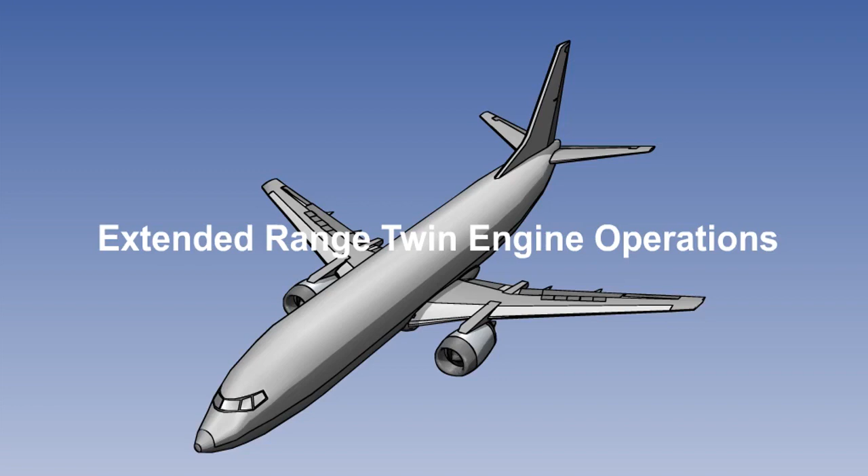ETOPS stands for Extended Range Twin Engine Operations. It is a regulatory framework to control the conduct of operations of twin-engined aircraft when their route takes them a long distance from the nearest diversion.

Let's start by first considering normal non-ETOPS operations. The majority of transport flights take place over routes where there are many en route alternate aerodromes. In the event of an emergency requiring an in-flight diversion, there are usually several available.

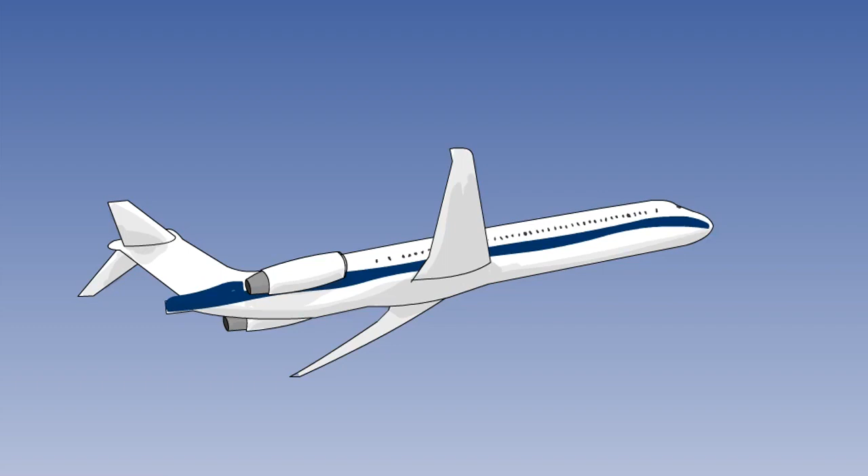Where there are no en route alternates, we have a procedure to establish point of equal time, otherwise known as critical point. However, proceeding for a long period with one engine out carries risks which have to be regulated and minimized. Traditionally, such operations were considered unacceptable for twin-engined aircraft.

For this reason, before 1985, long-range oceanic flights had to be carried out by 3 or 4 engine aircraft.

Under EASA rules, unless specially authorized by the controlling authority, a Performance Class A public transport twin-engined aircraft shall not fly a route that takes it more than 60 minutes flight time at its one engine out speed from an alternate. This is laid down in CSOPS, which was formerly known as JAROPS. Clearly, this imposes operational limitations.

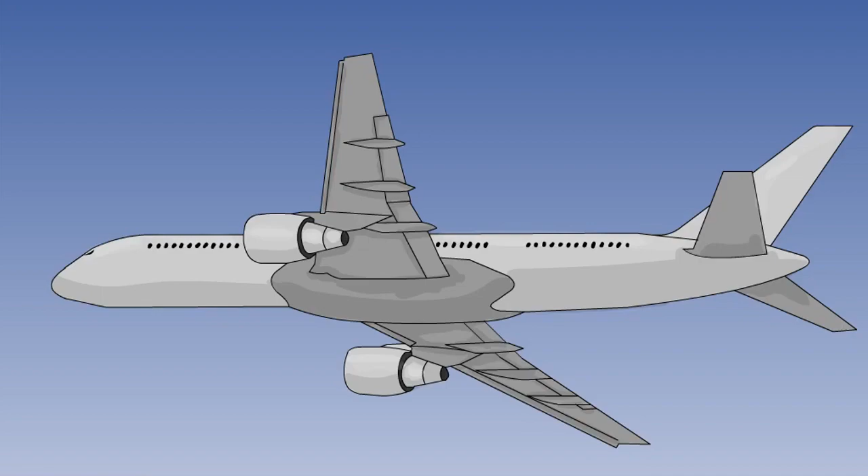This situation changed from the early 1980s onwards, when more powerful and reliable engines were developed. It became possible to build twin-engined aircraft capable of carrying large numbers of passengers over thousands of miles. Manufacturers and operators lobbied that the chances of an engine failing in flight were now extremely low, and also that

in the unlikely event of an engine failure, a twin-engined aircraft could still safely operate on one engine for longer periods than 1 hour. This argument was accepted, and the regulations were changed, allowing the first ETOPS flight to take place in 1985.

However, the regulation and control of such flights is extremely stringent. Each operator requires an individual ETOPS approval from its National Aviation Authority, and only certain approved aircraft types can be authorized.

Let's look at some of the definitions used in ETOPS. Firstly, ETOPS itself. The letters stand for Extended Range Twin-Engine Operations. It is defined as those operations intended to be, or actually conducted by twin-engined aircraft over a route that contains a point further than 1 hour's flying time in still air at the normal one engine inoperative speed from an adequate aerodrome. We shall look at the definition of an adequate aerodrome shortly.

We therefore need to define the normal one engine inoperative speed. The operator is required to determine a speed for the calculation of the maximum distance to an adequate aerodrome for each two-engine type.

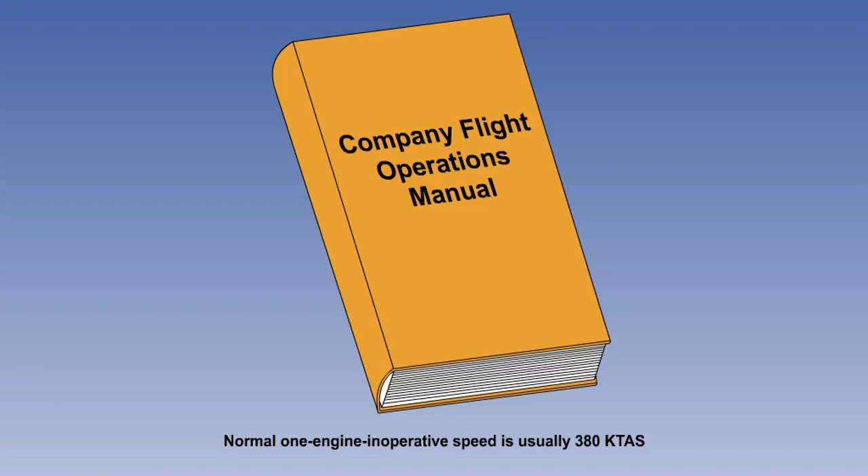The threshold time is the maximum time that a twin-engined aircraft is permitted to fly on one engine on any route unless it is governed by ETOPS regulations. It is 60 minutes.

Alternatively, it may be defined for some operators as a threshold distance, in which case it is the distance travelled in still air in 60 minutes at the normal one-engine inoperative cruise speed.

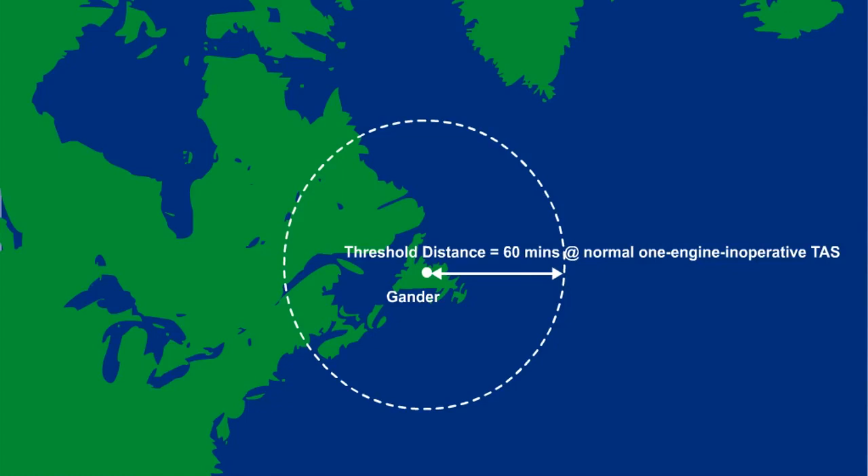However, where an ETOPS extension is granted, the rule time is used. This is defined as the maximum time at the normal one-engine inoperative speed that any point on the route may be from a suitable aerodrome for landing.

Again, we will look at the definition of a suitable aerodrome shortly. Alternatively, this may be quoted as a rule distance, in which case it's the distance travelled at the normal one-engine inoperative speed in the rule time.

The ETOPS entry point is that point along the track where the aircraft first passes the threshold distance from any adequate aerodrome. The ETOPS exit point is that point along the track where the aircraft is last more than the threshold distance from any adequate aerodrome.

The ETOPS segment is that portion of the route where the aircraft is more than the threshold distance from any adequate aerodrome. This may alternatively be known as the ETOPS sector. ETOPS regulations are applicable only over the ETOPS segment.

We now come to the definitions of an adequate aerodrome and a suitable aerodrome. Firstly, an adequate aerodrome. For every proposed ETOPS route, the operator must compile a list of alternate aerodromes to be used.

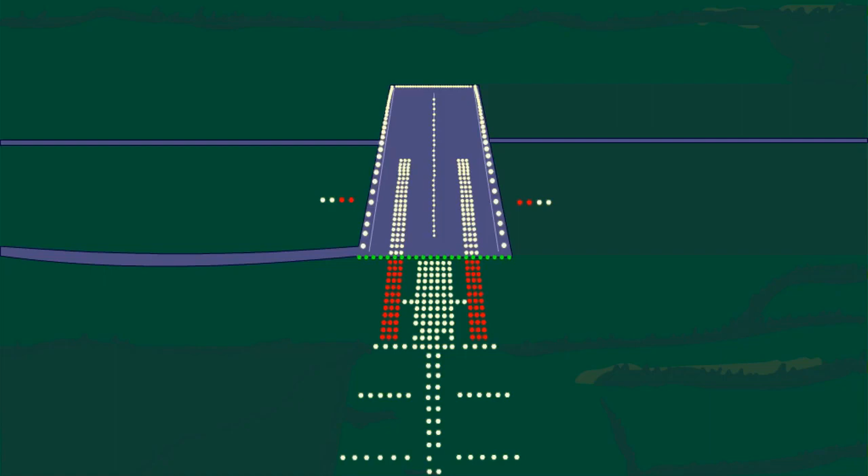These must be approved by the operator's National Aviation Authority and listed in the Company Flight Operations Manual. The runways must be long enough for the operator's aircraft types and must have a suitable surface and load-bearing capacity. The runway lighting must meet approved standards. There must be adequate air traffic control facilities.

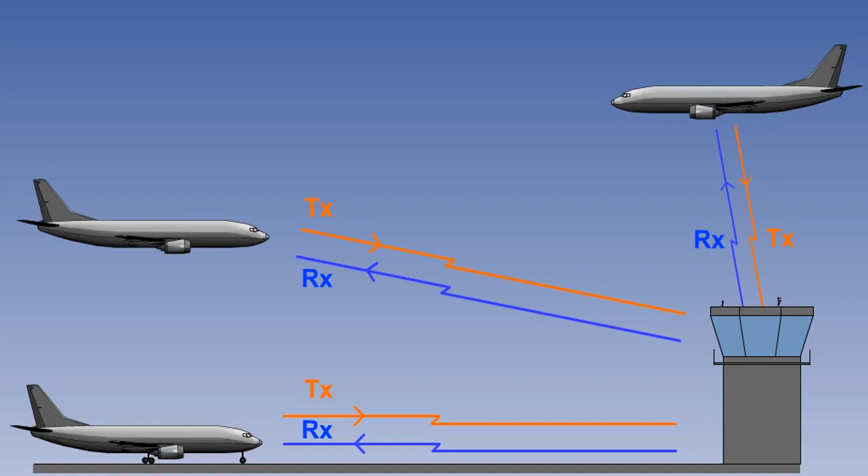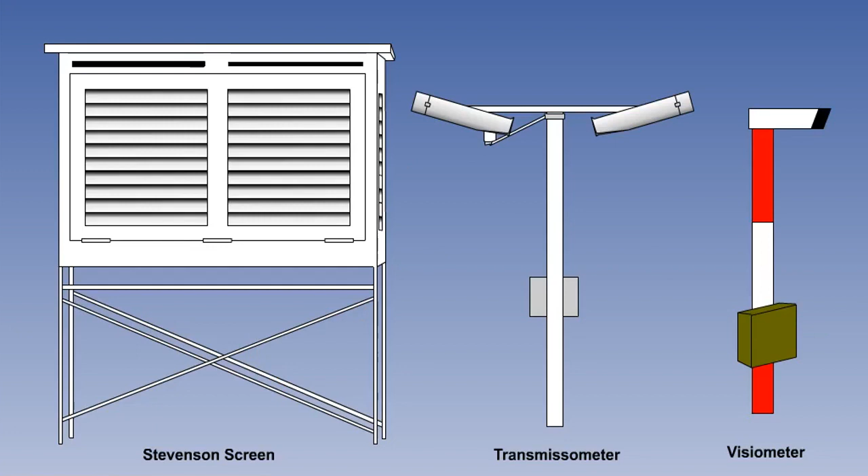Communications equipment must meet certain standards. There must be navigation aids and an instrument approach and letdown aid, ILS or ground radar. There must be appropriate weather reporting facilities. And fire and emergency services must meet requirements for the number of passengers to be carried.

Neither the company nor the aircraft commander of any flight has the authority to use any other alternate aerodrome on this route without approval from the National Aviation Authority, followed by an amendment to the Company Flight Operations Manual.

So, what is the difference between an adequate aerodrome and a suitable one? For any particular flight, the aircraft commander selects from this list of adequate aerodromes the ones that he will nominate as his alternates.

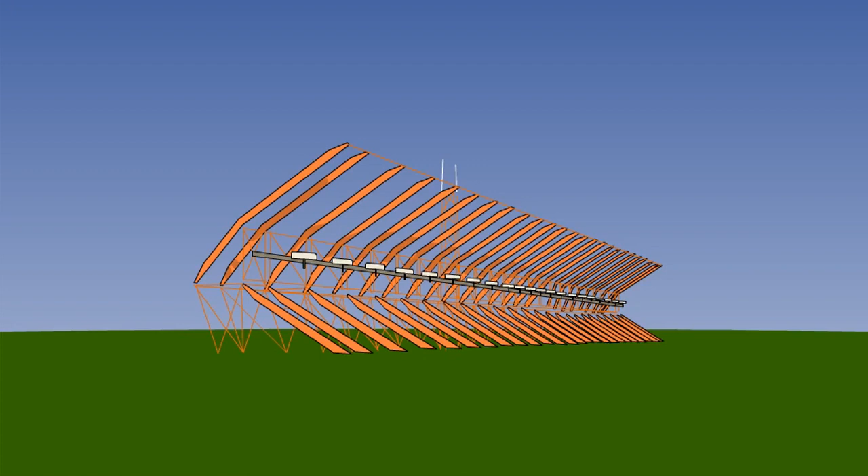Their weather must be forecast to be within limits at the time. The navigation and letdown aids must be serviceable. The fire cover must be in place. And each aerodrome must be open from 1 hour before it might first be needed until 1 hour after it might last be needed.

These become the suitable aerodromes for that flight and are nominated on the ATC flight plan.

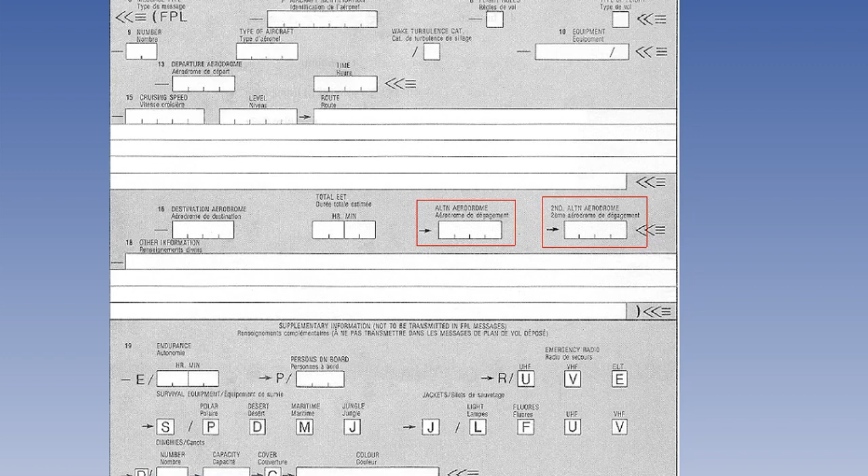We said earlier that ETOPS flights are subject to more stringent regulation and control than normal non-ETOPS operations. It is a requirement to compile a minimum equipment list for any public transport operation. However, for ETOPS operations, the existing MEL must be re-evaluated and adjusted as necessary to reflect the higher safety standards required for prolonged operation on one engine.

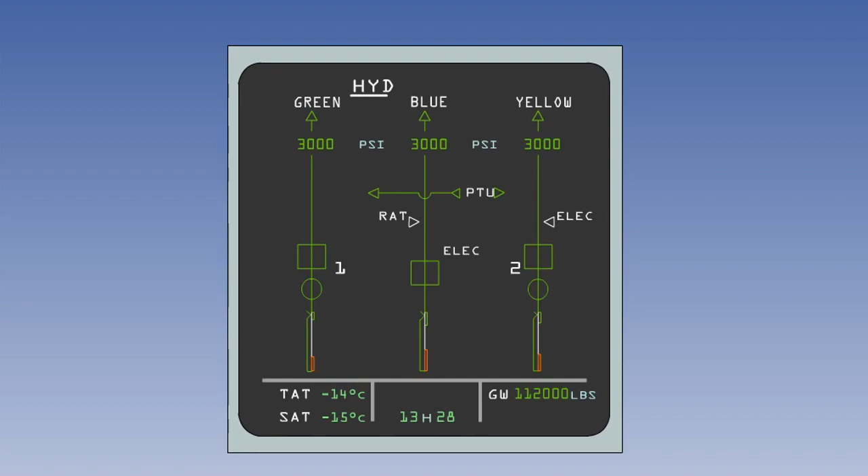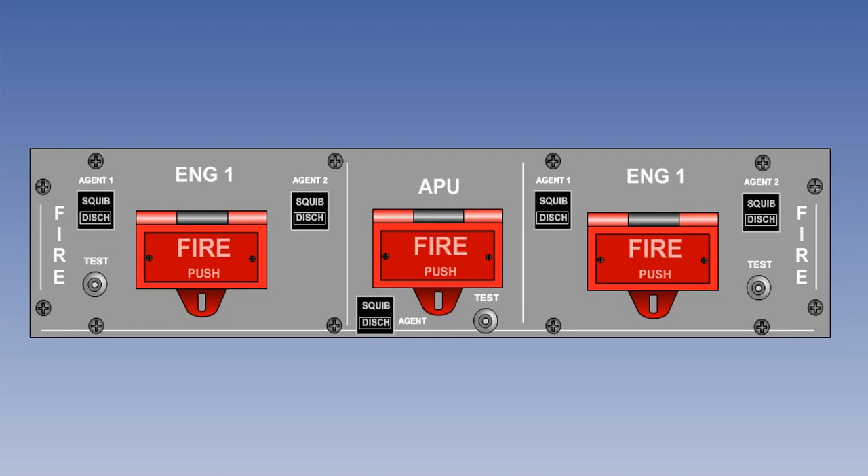These will include reappraisal of such systems as hydraulics, electrics, instrumentation, fire suppression, air conditioning and pressurization, and many others.

Critical point is always an important consideration in any flight which takes place a long distance from alternates, whether ETOPS or not. The easiest method of calculating it, and certainly the one you should use for exam questions, is the equation that x equals dh over O plus h. However, there are many other ways of establishing it.

One of them is by use of the Jeppesen North Atlantic Plotting Chart, Chart NAP in the Jeppesen Manual. The chart has a number of circles centered on various airfields. The dotted lines represent a rule time of 180 minutes flight time, and the solid lines represent a rule time of 120 minutes and a distance of 820 nautical miles. A TAS of 410 knots has been assumed.

In the centre of the chart is a line with an arrow at each end. The left arrow points to Charlie Yankee Quebec X-ray, which is Gander, and the right one to Echo India November November, which is Shannon. The orientation of the arrow is the great circle track between Shannon and Gander, and the figure 1715 is the total distance between them. The vertical line through the figure shows the halfway point.

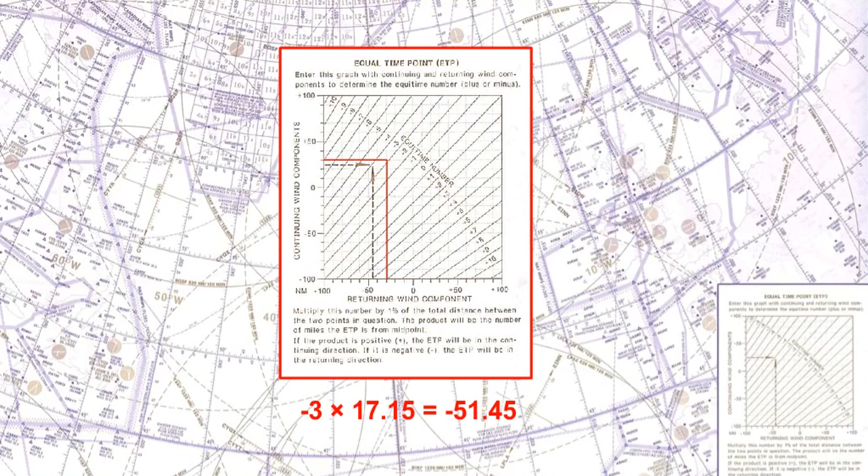The intersection of the two lines gives an equitime number of -3. As the total distance between Shannon and Gander is 1715 nautical miles, 1% is 17.15. Multiplying by -3 gives a distance of -51.45.

As the answer is negative, we move the equal time point 51.5 nautical miles in the returning direction, towards Shannon. The distance markers on the arrow between Shannon and Gander help us plot the position. This is a quick and simple way of adjusting the equidistant point for wind component to make it the equal time point, or critical point.

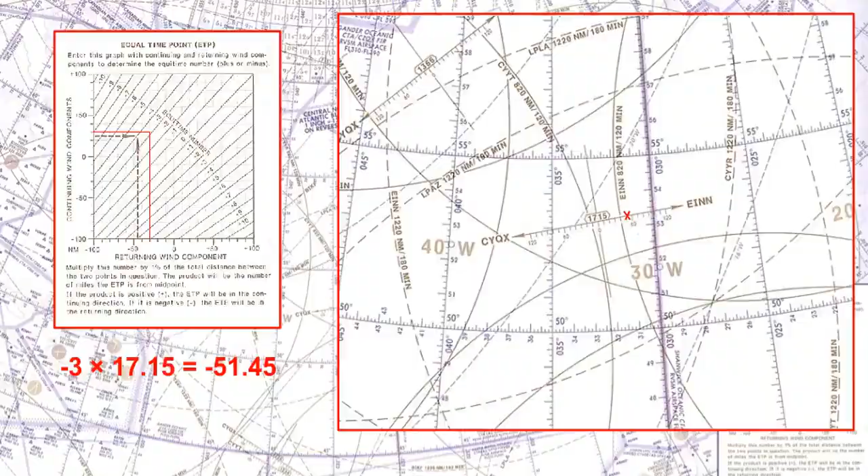The Jeppesen graphical method of establishing critical point requires the graph to be included on the published chart. Additionally, it is valid for only one TAS, which may not be the one that our aircraft uses. A method that can be used on any navigational chart and for any TAS utilizes direct plotting of the wind vector.

We start by plotting the still air critical line, which is the halfway mark. We now work out the time taken in still air to fly to either aerodrome at the one engine out speed. The distance from Shannon to Gander is 1715 nautical miles, so the distance from the halfway point to either of them is 857.5 miles. At the typical one engine out TAS of 380 knots, this would take 2 hours and 15 minutes.

We now apply the wind vector. As an example, we shall assume that the forecast wind velocity is 315 at 50 knots for the whole of the route. However, this is just 1 hour's worth of wind. From the critical point, the aircraft would be in this wind for 2¼ hours. We therefore need to expand our wind vector by this factor. 50 knots for 2¼ hours gives a vector length of 112.5 nautical miles.

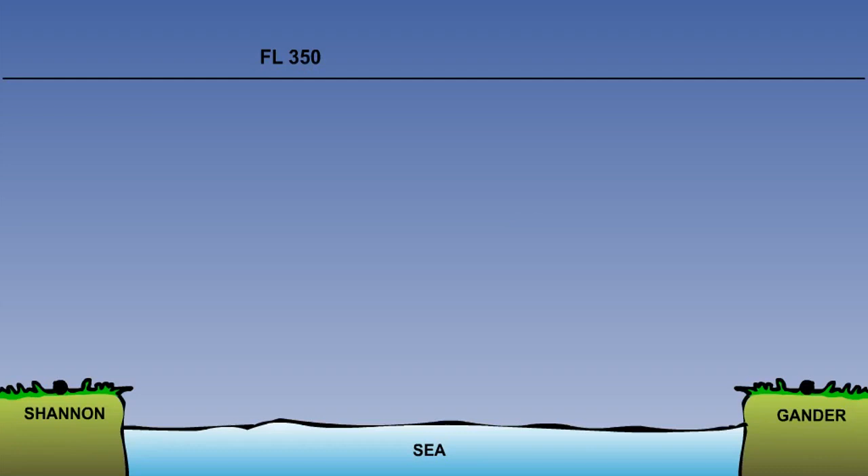Fuel policy also needs to be closely addressed for ETOPS operations. Imagine an aircraft on an ETOPS segment between Shannon and Gander. The aircraft has arrived at the critical point and the flight is proceeding normally with no emergency. How much fuel is required to complete the flight?

Firstly, we need the trip fuel for the remaining part of the flight. We also require the remaining contingency fuel, which is usually 5% of the remaining trip fuel. Alternate fuel is required, and we also need to have final reserve fuel. Let's assume that, as an example, this amount comes to a total of 6,800 kilograms.

Now imagine the aircraft to be back at the critical point, but this time we have an engine failure. The aircraft will drift down to its stabilizing altitude. The actual altitude on the day will depend on weight and temperature, but for most modern airliners it will be in the medium to high 20,000s of feet. We will assume that it is flight level 250.

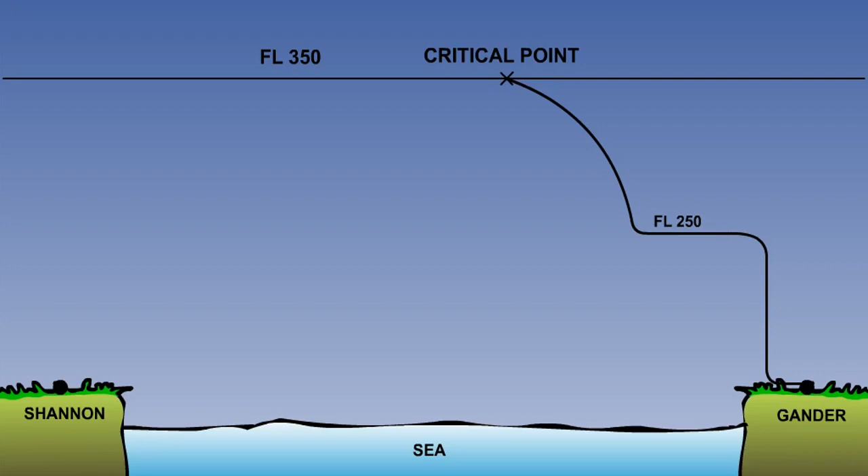The lower altitude and slower true airspeed will result in a longer flight to the alternate and an increase in the fuel required. If the aircraft had proceeded back from the critical point, it would have taken the same time and used a very similar amount of fuel.

However, a pressurization failure could be a worse case. It would be essential to initiate an immediate descent to flight level 100. This would reduce the speed and increase the fuel consumption still more. This would be followed by a letdown and an instrument approach to the airfield. And again, if the aircraft had proceeded back instead of onwards from the critical point, it would have taken the same time and used a very similar amount of fuel.

A pressurization failure might be caused by a leak or mechanical failure, in which case both engines would still be available. However, it might be that an engine had failed and the one which had failed was the one which powered the pressurization system. Each of these situations uses a different amount of fuel, and we have to cover the worst case.

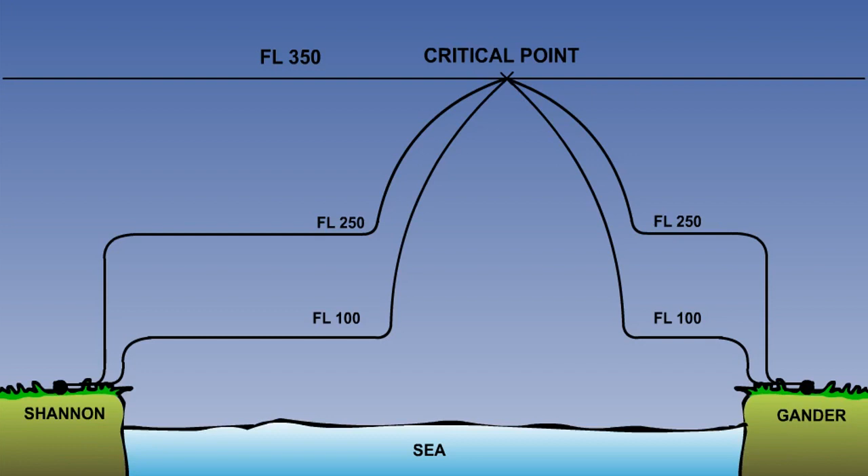The rules for the required fuel following an engine failure are not quite the same as the normal case. We need the remaining trip fuel, but this time for the descent, the transit at flight level 100, and the second descent to 1500 feet, plus the normal 5% contingency fuel. We don't need alternate fuel. We are already diverting. The remaining trip fuel and contingency fuel has become the alternate fuel.

We still need final reserve fuel, but it is assumed that if you've just flown halfway across the Atlantic on one engine, you'll get a certain amount of priority when you arrive. Final reserve fuel is therefore reduced to 15 minutes instead of the usual half hour. In addition, we are required to have fuel for an instrument approach, which may not be successful, so we'll also need the fuel for a missed approach procedure, another instrument approach, and a landing.

Will this amount of fuel come to more than the amount we would have needed if the flight had proceeded uneventfully? That was 6,800 kilograms. The answer is that it depends on the circumstances.

There are many variables. If the aircraft had been proceeding to Los Angeles after passing Gander, there would have been plenty of remaining normal trip fuel. However, if it had been going to Gander or Montreal, there would not. The number of engines available to us will also make a difference. One engine is usually more economical than two, but if both are working normally following a pressurization failure, you would not plan to shut one down in order to save fuel.

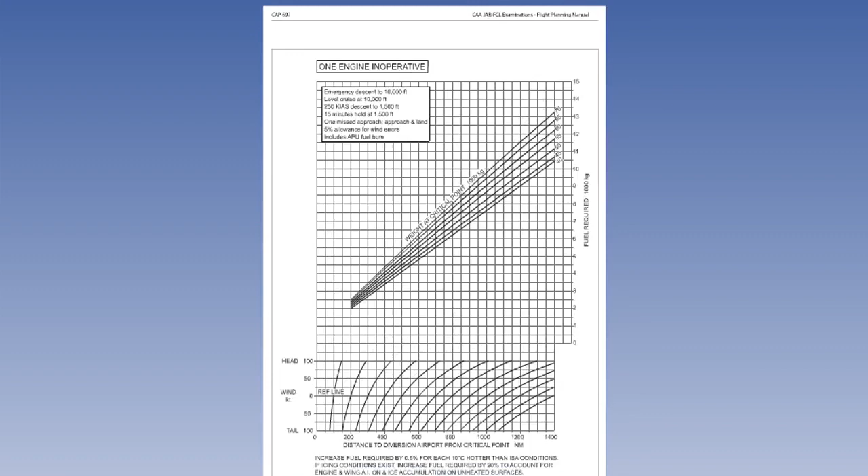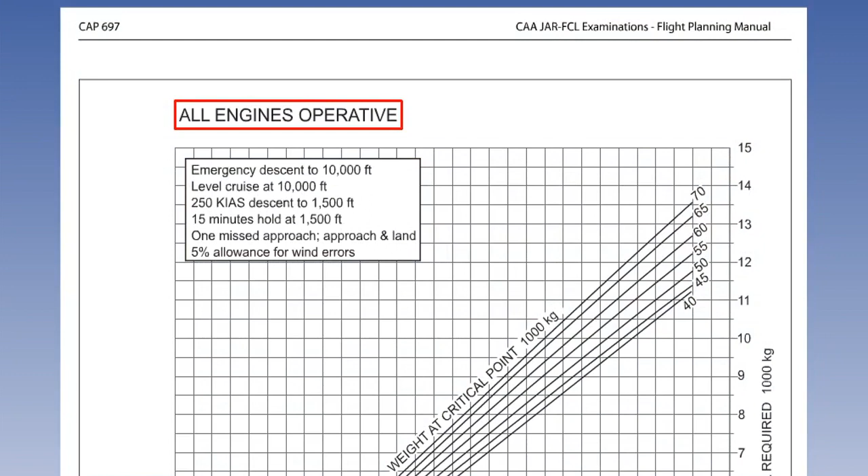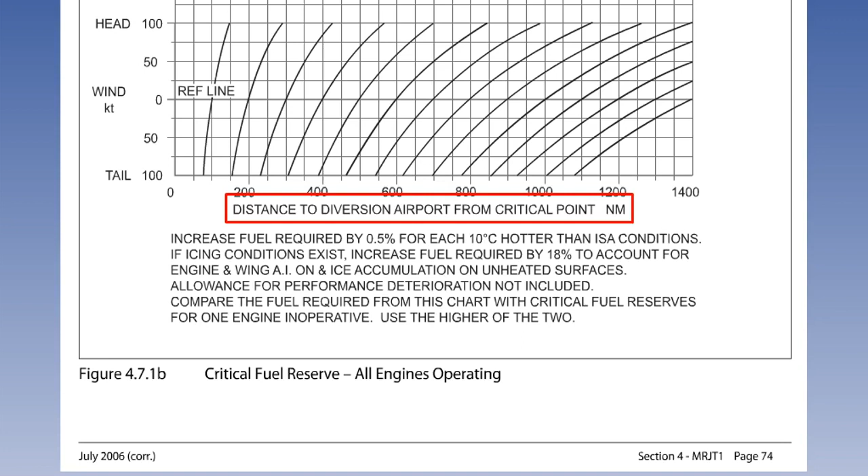CAP 697 gives us the data to calculate critical fuel for the Boeing 737-400. The relevant graphs are figure 4.7.1 Alpha on page 73, which is for the one engine case, and figure 4.7.1 Bravo on page 74, which is for two engines. These are used for pre-flight planning to establish critical fuel. Notice that at the bottom it says, distance to diversion airport from critical point. The calculation is from the critical point, not the actual point of diversion. This covers the worst case.

Let's see what they include. For the all engines operative case, the white box at the top left says, emergency descent to 10,000 feet, level cruise at 10,000 feet, 250 knots indicated airspeed, descent to 1500 feet, 15 minutes hold at 1500 feet, 1 missed approach, approach and land, and 5% allowance for wind errors.

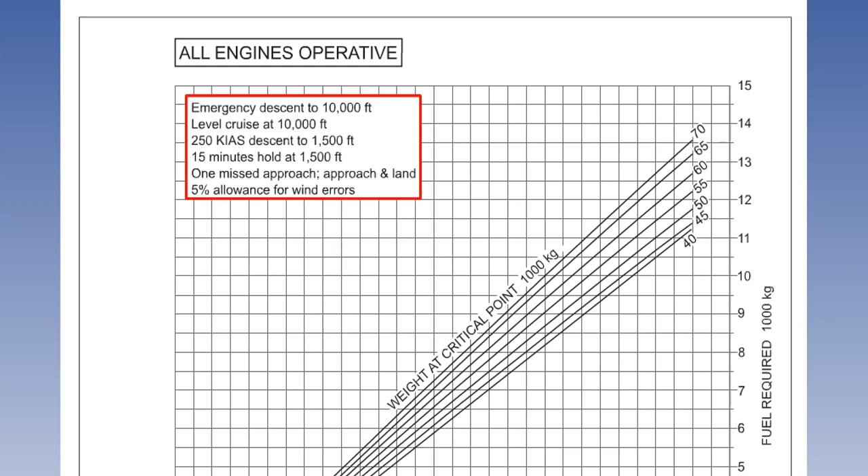For the one engine inoperative case, it is the same except for the last line where we have the words 'includes APU fuel burn.' This is because the engine which has failed may be the one which supplies essential services such as electrics or hydraulics. If so, we may need to have the auxiliary power unit on to keep these going.

Now let's see how they are used. We'll assume that the critical point is 600 nautical miles from the alternate to be used. There is 50 knots headwind and the aircraft total weight at the critical point is 50,000 kilograms. Icing is forecast at 10,000 feet.

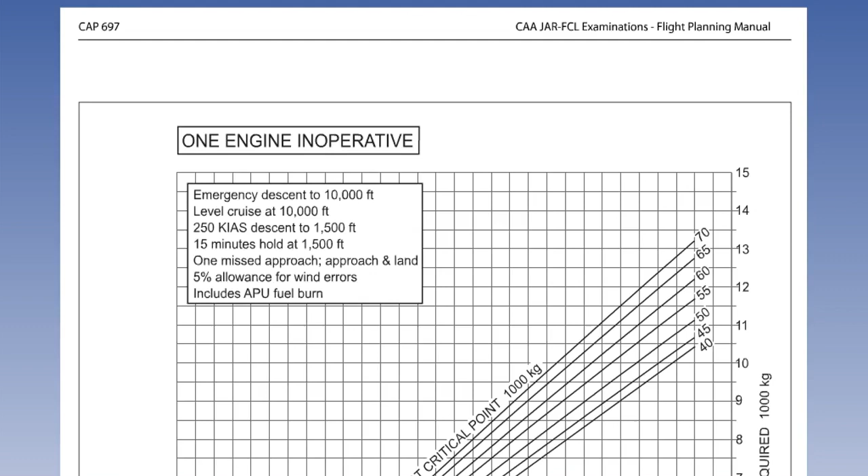We enter the one engine inoperative graph at the bottom at 600 nautical miles distance from critical point to diversion airport, and go vertically to the wind reference line. We then follow the wind trend lines up to 50 knots headwind.

Then we go vertically to the sloping line for the appropriate weight at the critical point, 50,000 kilograms in this example. Then travel horizontally to the right-hand edge and read off the fuel, which, in this case, is 6,100 kilograms.

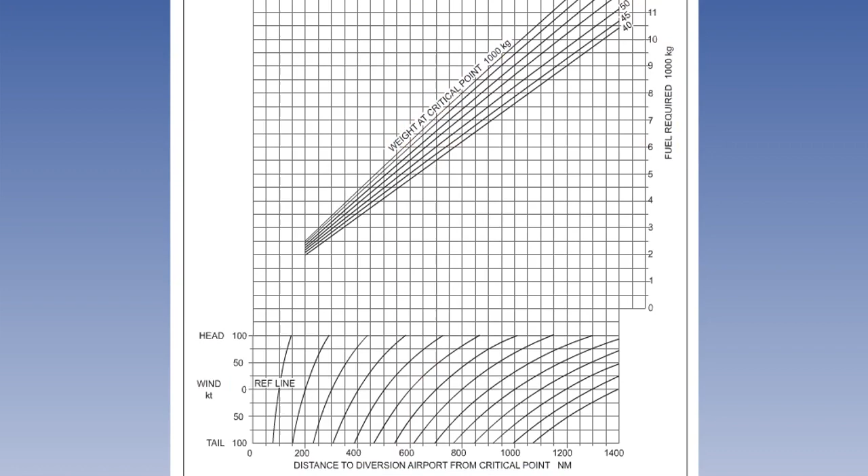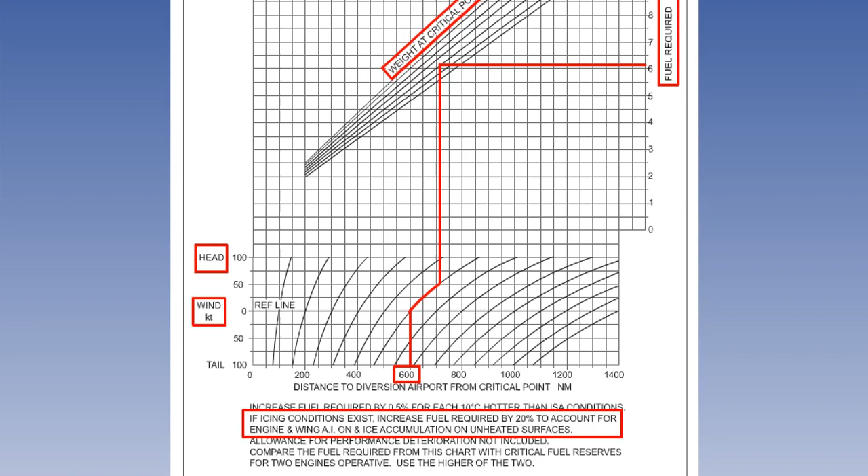But remember, icing was forecast. Read the second and third lines under the graph. If icing conditions exist, increase fuel required by 20% to account for engine and wing anti-icing, and ice accumulation on unheated surfaces. 6,100 plus 20% comes to 7,320 kilograms.

However, we haven't finished yet. Read the last two lines under the graph. They say, compare the fuel required from this chart with critical fuel reserves for 2 engines operative. Use the higher of the two.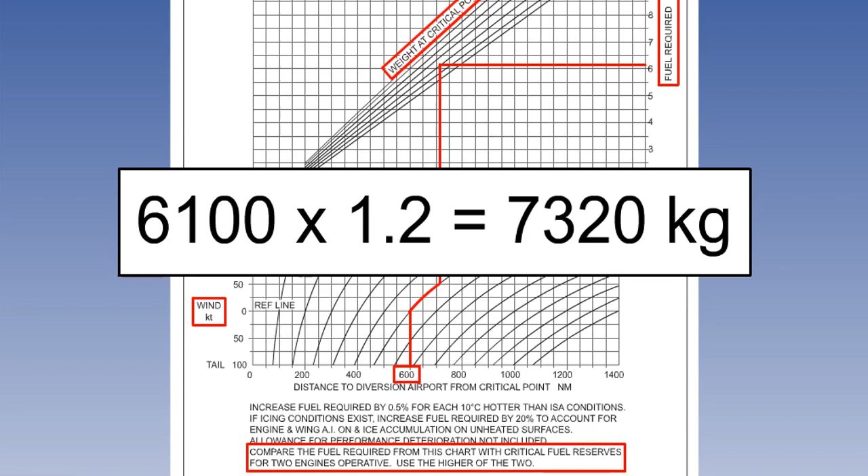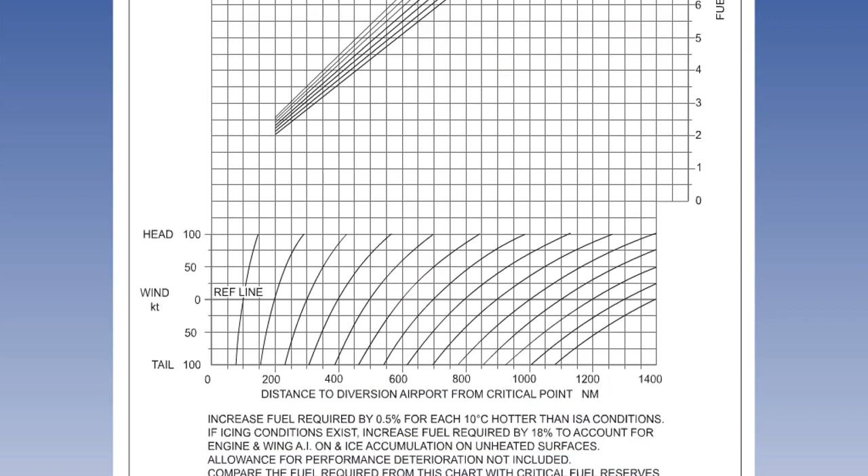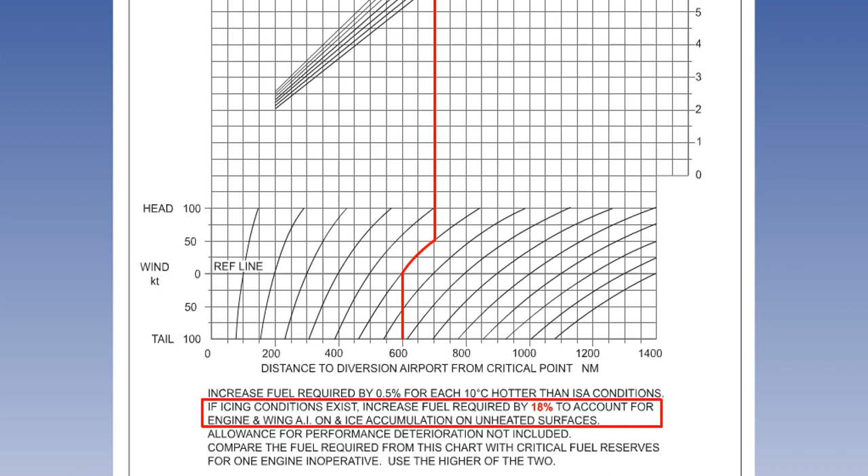So now we do it all again with the all engines operative graph. This time we get 6,300 kilograms before allowing for icing. But the icing correction figure is 18% for the 2 engine case. 6,300 plus 18% comes to 7,434 kilograms.

So we take the worst case. Not surprisingly, 2 engines use more fuel than 1, though perhaps it is surprising that they use so little more. Our critical fuel is 7,434 kilograms.

There is just one other feature to point out before leaving the use of this graph. The fuel burn is for ISA conditions. For every 10 degrees hotter than ISA, we add 0.5% to the fuel. That's not 5%, it's 0.5%. So, for instance, if the graph figure was 6,000 kilograms and the temperature were 20 degrees above ISA, we'd add 1%. This would give a final figure of 6,060.

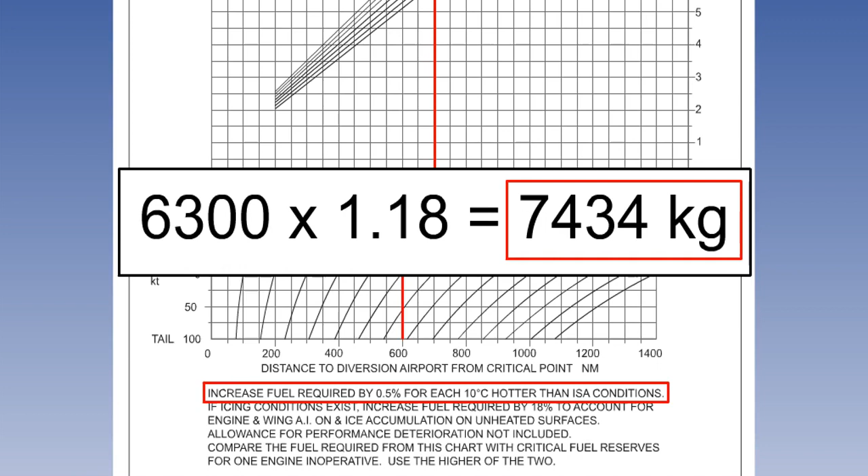We also need to be able to use the area of operation table at figure 4.7.2 on page 75 of CAP 697. The ETOPS area of operation is defined as the area within which the operator is authorized to conduct extended range operations. This area will be specific to each route.

For instance, the distance from Shannon to Gander is 1,715 nautical miles. Therefore, the area of operations will be half that figure, 858 miles.

The maximum distance to any diversion within the rule time can be found from figure 4.7.2. This is based on ISA conditions in still air, 1 engine inoperative and a drift down to stabilizing altitude starting at or near the optimum altitude.

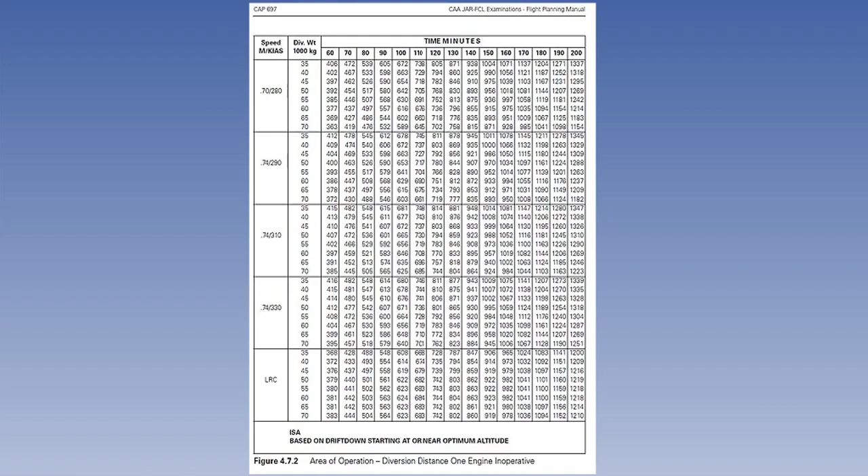The left column groups the table into the speeds to be flown for the drift down. For the first, for instance, the aircraft is held at Mach 0.7 until the indicated airspeed reaches 280 knots. The bottom one is for operation with the flight management computer, which has a facility to calculate long-range cruise drift down on 1 engine.

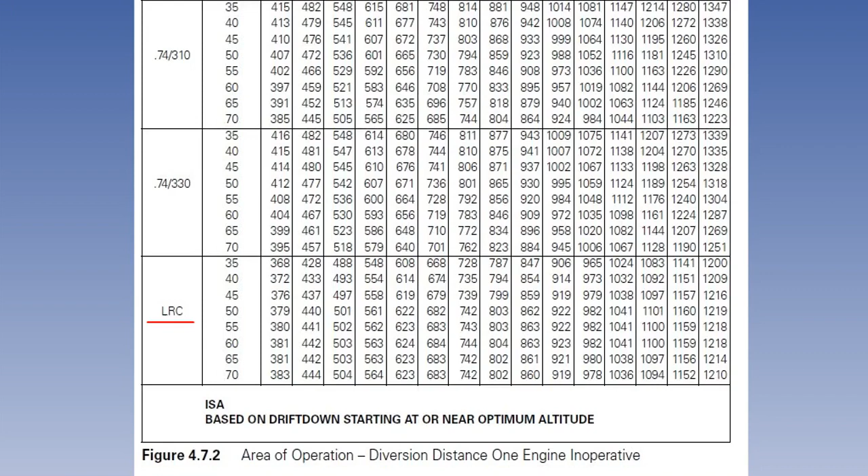We enter via the left-hand two columns with the drift down parameters and the weight at the start of the diversion. We will use Mach 0.7 and 280 knots and a start weight of 50,000 kilograms. If the rule time is 120 minutes, the maximum diversion distance is 768 nautical miles.

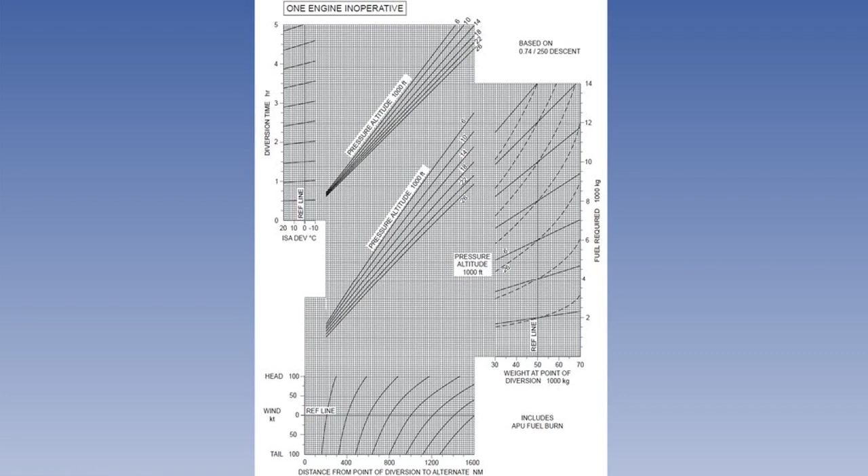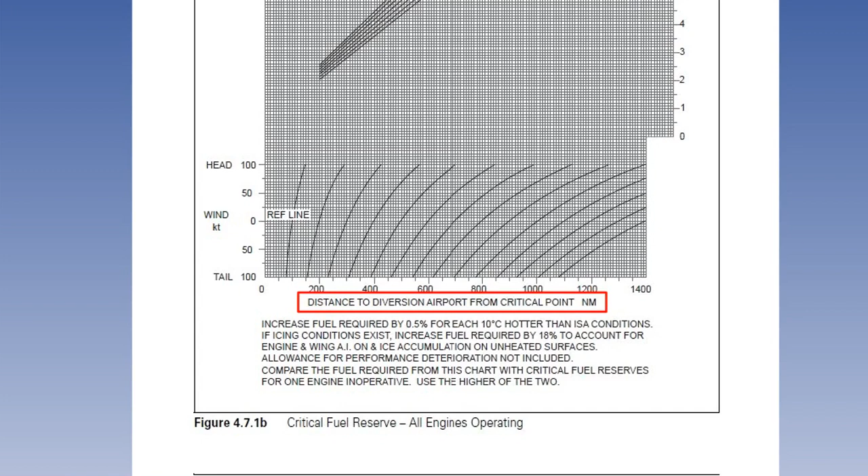Finally, we come to the in-flight diversion graph. This is different from the two we looked at earlier. You will remember that those were for planning purposes, worked from the critical point to establish the critical fuel, and covered the worst case. However, if a crew experiences an in-flight emergency, they are not going to proceed to the critical point. They will divert from wherever they are.

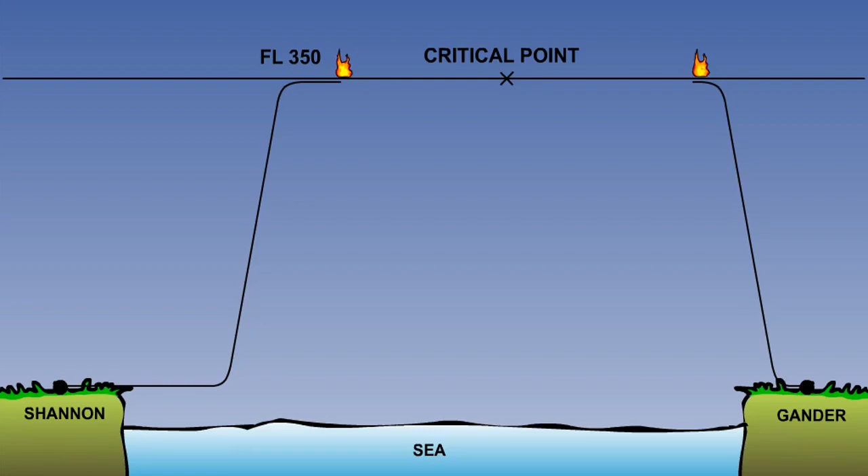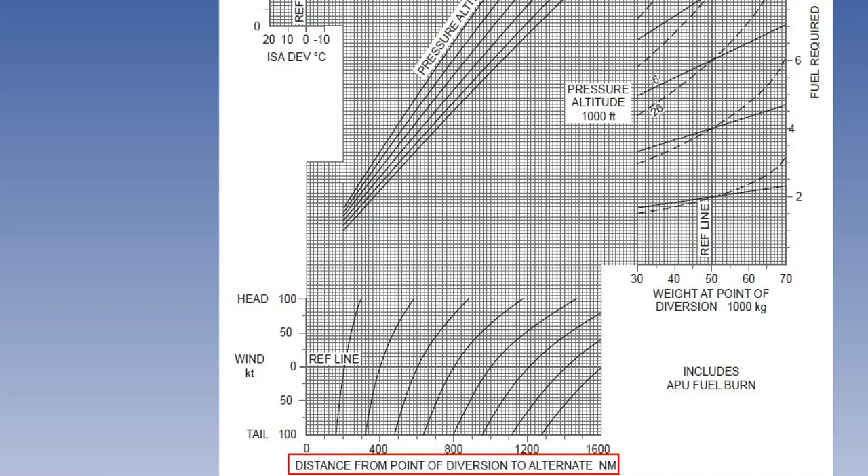Figure 4.7.3 on page 76 is for in-flight diversion. Note that the caption at the bottom says, 'Distance from point of diversion to alternate.' It works just like all the other simplified fuel planning graphs. We will use the following figures as an example.

Distance to diversion, 800 nautical miles. Weight at start of diversion, 45,000 kilograms. Stabilizing altitude, flight level 260. 50 knots tailwind. Temperature is ISA minus 10. If we follow the lines in the usual way, we get 3,700 kilograms and 2 hours flight time.

Note that this is the actual fuel burn, including the APU burn. There is no contingency fuel or any of the other reserves that we had in the planning graph. You simply subtract the figure obtained from the graph from your current gauge reading to get the expected fuel on arrival at the destination.

Any airline which is sophisticated enough to operate ETOPS will use computer flight planning. Here is a route. We've seen it before. It's from Muscat, which has the ICAO code Oscar Oscar Mike Sierra, to Malé, which is Victor Romeo Mike Mike. Our en route alternate is Mumbai, or Victor Alpha Bravo Bravo.

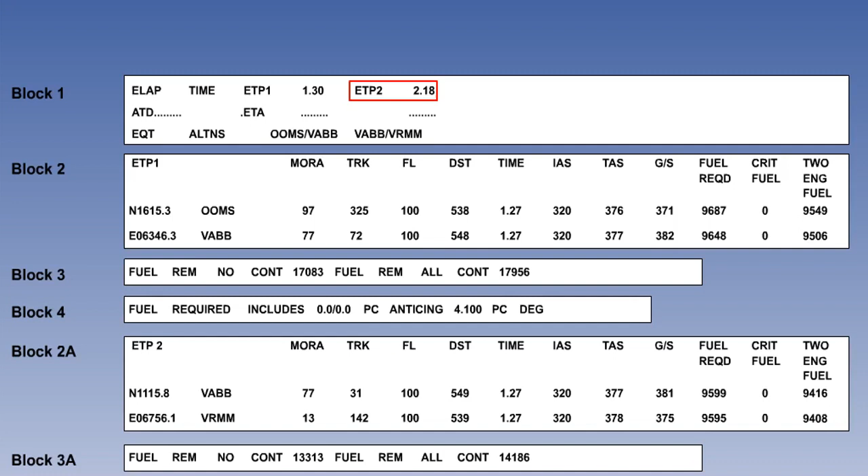This is what the computer flight plan looks like. Block 1 tells us that the time from takeoff to equal time point 1 is 1 hour 30, and from takeoff to equal time point 2 is 2 hours and 18 minutes. Block 2 gives us the calculated position of equal time point 1 and tells us that it is between Muscat and Mumbai.

If we go back to Muscat, our minimum off-route altitude, or safety altitude, will be 9,700 feet. If we divert to Mumbai, the safety altitude will be 7,700 feet. The track back to Muscat is 325, and on to Mumbai is 072. Do these look right?

Let's look at the route. This should be 325 - that looks about right. And this should be 072 - that looks good as well.

The planned flight levels are 100 in each case, to cover a pressurization failure. And here are the distances. Note that they are close, but not identical - this is the effect of wind. And here are the times. These have got to be the same.

The one-engine IAS is 320 in each case, but the TASs are different. The one to Mumbai is slightly higher. Why do you think this is? After all, the flight levels and IASs are the same.

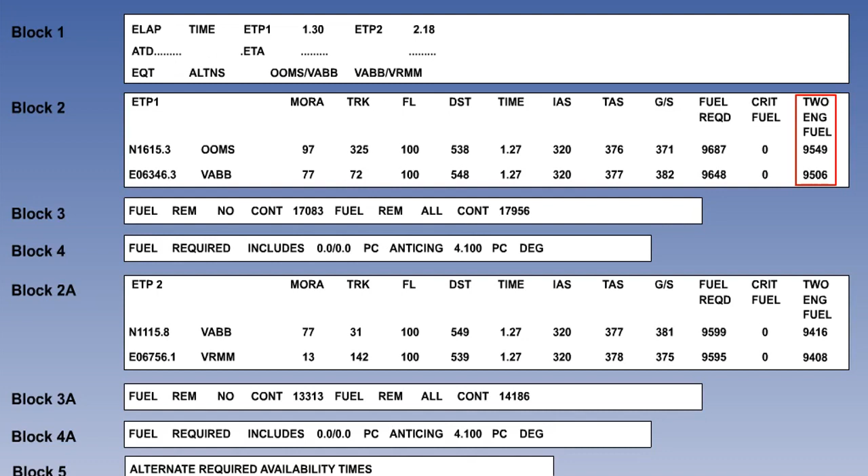And finally, in Block 2, we have our fuel burns for the two-engine case at flight level 100. For this aircraft, they are very slightly less than the single-engine case.

We now move to Block 3. This gives us the predicted fuel at equal time point 1. If we have no contingency fuel, it is 17,083 kilograms. However, if we have all the contingency fuel remaining, we will have 17,956.

Block 4 tells us that no allowance has been included for anti-icing - again, no surprises there, we are close to the equator. However, there is a 4.1% factor included for the performance degradation of this particular aircraft. This figure will have been established from past flights.

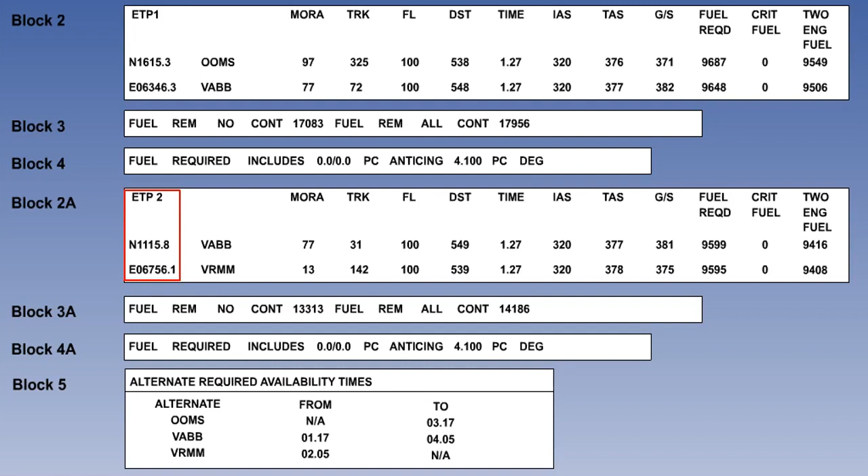Now let's look at Block 2A. This is the equivalent of Block 2, but for equal time point 2. Note that equal time point 1 was at about 16 north, but this is at 11 north. This is what you would expect from looking at the route - it's between Mumbai and Malé.

Look at the safety altitudes for these two. Mumbai's is 7,700 as before, but why do you think Malé's is so low? You should be able to work it out.

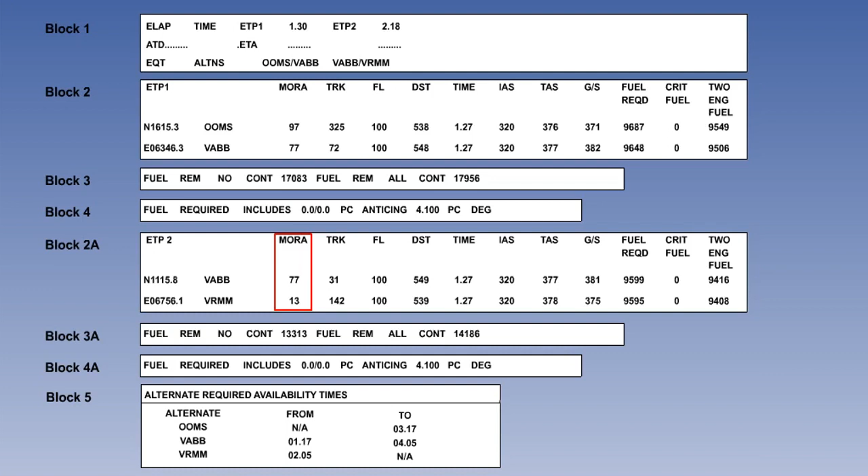The Maldive Islands are a group of coral atolls with an average elevation of 5 feet. The highest elevation on the islands is 8 feet. 300 feet has been added to cover unknown buildings, and then a 1,000-foot safety factor has been applied to give 1,300 feet.

Let's check that the tracks look sensible. From equal time point 2 to Mumbai should be 031, and to Malé should be 142. They look all right. The rest of Block 2A and Blocks 3A and 4A follow a similar pattern to Blocks 2, 3 and 4. This has been a demonstration of how to check a computer flight plan. Nobody expects you to recalculate all the figures, that's what the computer's for. But you should be able to understand the reasons for the data you see, and explain them to yourself, and pick up any apparent discrepancies.

You'll remember that we said at the start of this lesson, in discussing suitable aerodromes, that they have to be available from 1 hour before they might first be needed until 1 hour after they might last be needed. This is also covered in the computer flight plan in Block 5.

Let's start with equal time point 1. This is the last point at which we could possibly divert back to Muscat. We'll be able to work out that, if we did, we would arrive at Muscat at 2:17. However, equal time point 1 is also the first point at which we could possibly divert to Mumbai, and because it is an equal time point, we would arrive at either Muscat or Mumbai at the same time. That time must be 2:17.

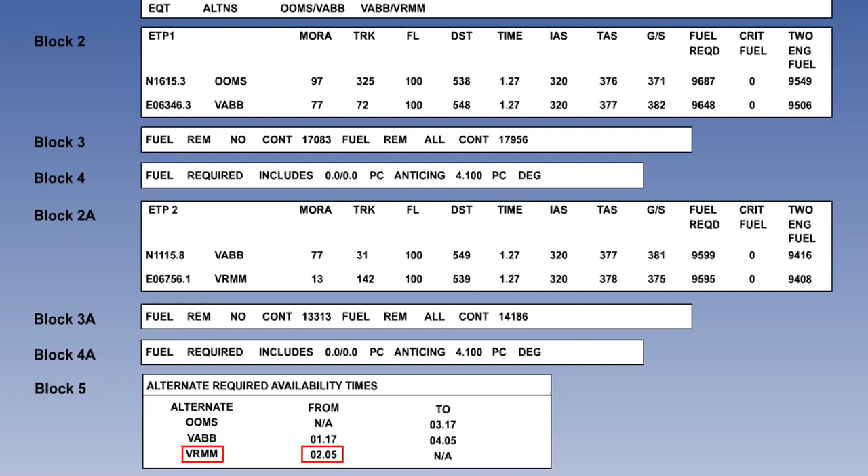Let's summarise this lesson. ETOPS is a regulatory framework to control the conduct of operations of twin-engined aircraft when their route takes them a long distance from the nearest diversion. Under EASA rules, unless specially authorised by the controlling authority, a Performance Class A public transport twin-engine aircraft shall not fly a route that takes it more than 60 minutes flight time at its one-engine-inoperative speed from an alternate.

ETOPS is defined as those operations intended to be, or actually, conducted by twin-engined aircraft over a route that contains a point further than 1 hour's flying time, in still air, at the normal one-engine-inoperative speed, from an adequate aerodrome.

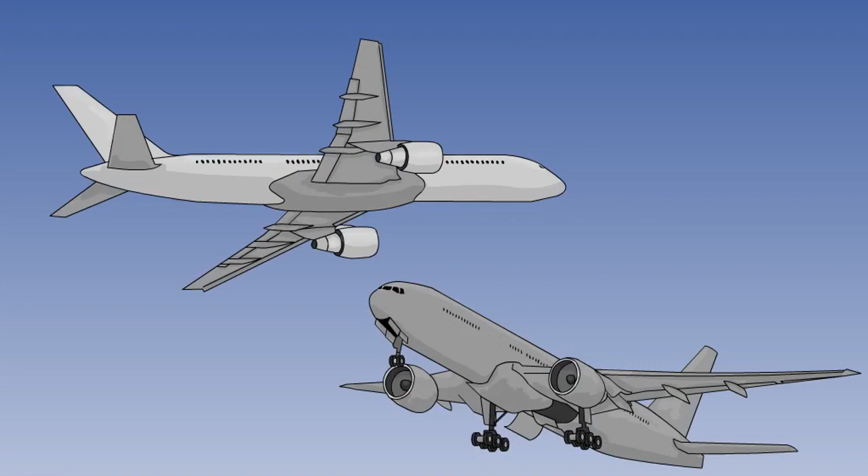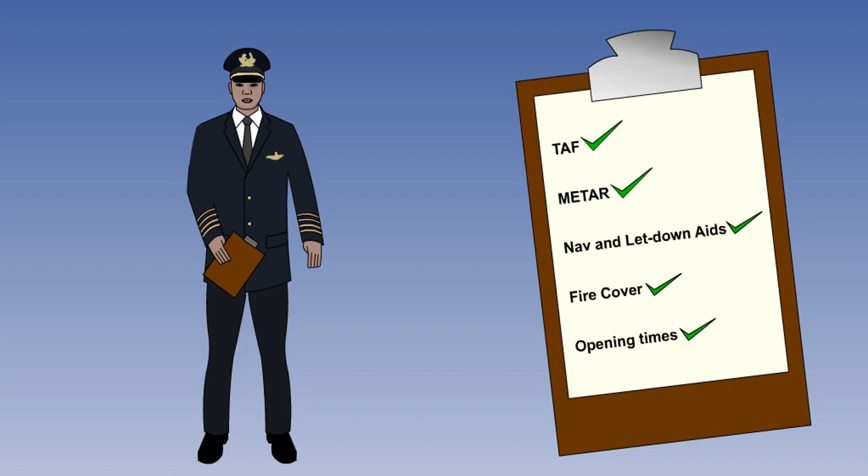The regulation and control of ETOPS flights is extremely stringent. Each operator requires individual ETOPS approval from its National Aviation Authority, and only certain approved aircraft types can be authorised. An adequate aerodrome is one selected by the operator and listed in the company flight operations manual, whereas a suitable aerodrome is one selected by the commander of the flight from the list of adequate aerodromes.

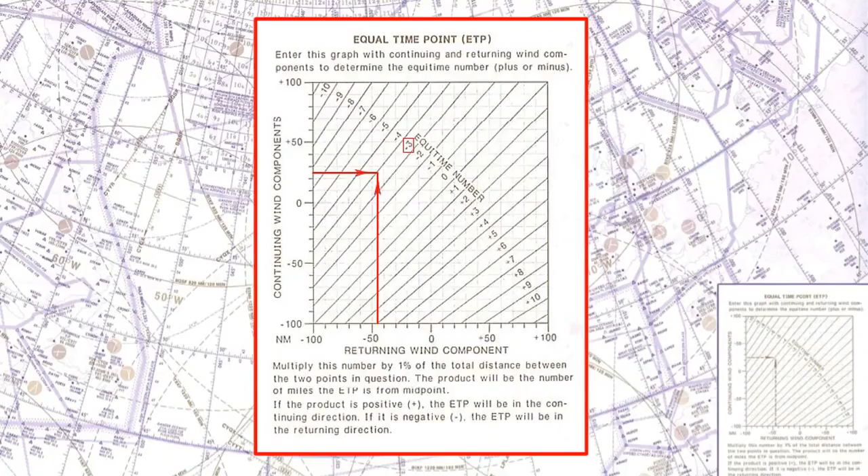The minimum equipment list requirements are more stringent than normal operations, and the calculation of critical points becomes extremely important. Make sure that you are familiar with the use of the Jeppesen graph, although any ETOPS operator would in fact provide the pilots with computer-generated calculations, possibly including several alternates.

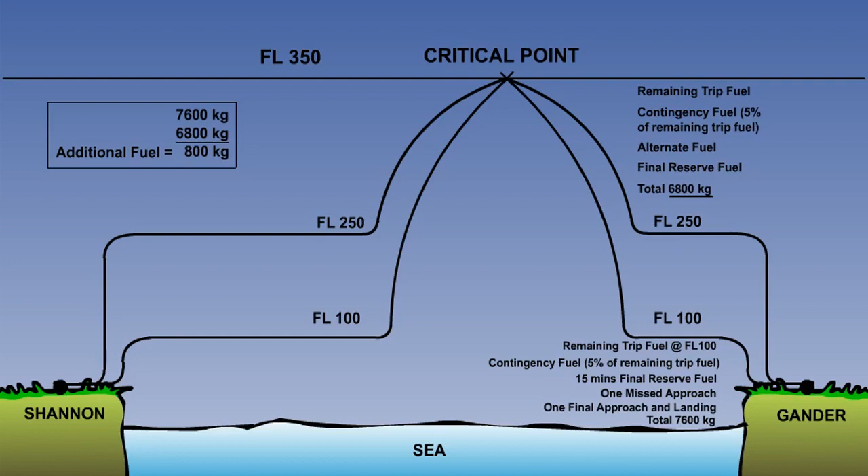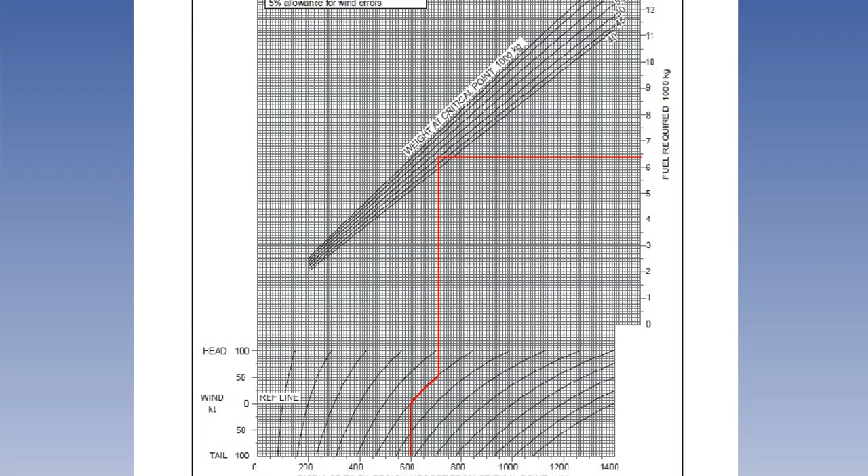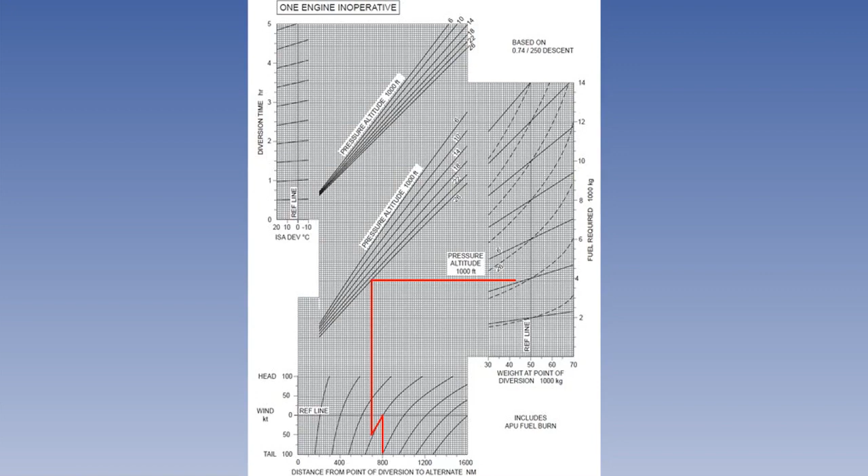It is necessary to establish what the critical fuel is and whether an uplift of additional fuel is required. You need to be familiar with the use of the critical fuel graphs on pages 73 and 74 of CAP 697, the area of operations table on page 75, and the in-flight diversion graph on page 76. These are all examined.

We finished by looking at an ETOPS computer flight plan to bring these ideas together and to show you how to give the flight plan a quick common sense check. And we emphasized that any suitable aerodrome must be available from 1 hour before it might first be needed until 1 hour after it might last be needed.